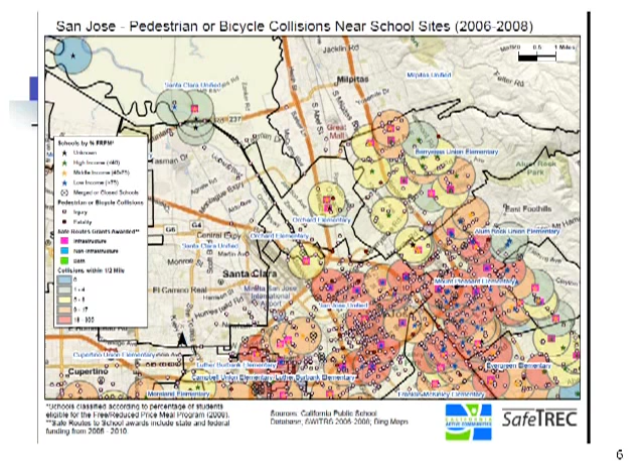Another activity is constructing a database of about 8,000 California schools, primary, secondary, and high school, and conducting mapping of collision injuries around these schools. This is an example. We would like to expand this into a database where we can rank schools with respect to walkability or potential for walking and biking, and also potential for injury reduction.

Another project, this is close to home, obviously, is a study of pedestrian and bicycle safety around the UC Berkeley campus, called the UC Campus Periphery Project. And you can see a map there of several years of injuries. And we're at the end of a phase of that project where we've produced a report that will go to the university and also to the city of Berkeley.

We've conducted a number of other studies. This happens to be barriers to transit among seniors. By the way, our reports on all of these are on our website, and a number are also published.

Some examples of data activities. As everyone knows, there is a trend in funding and in resource allocation toward justification by data, by information and appropriate data. One of our early roles has been a contract with California for data support for the Strategic Highway Safety Plan.

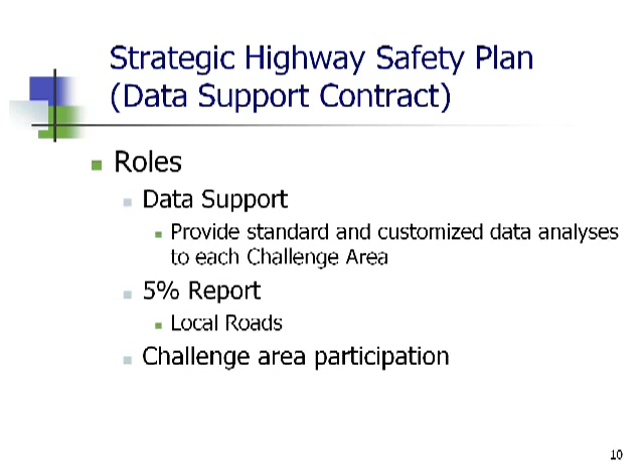We provide various reports for this whole program. We also do the 5% report for the non-state highway roads in California. We produce all the data, for example, for these various reports. And the 5% report for California and for every state is on the FHWA website.

One tool that we're not talking about today, but we could at some other webinar, is something called Continuous Risk Profile, developed by a postdoc named Koohong Chung, who's now working with Caltrans. It's a method for fitting collision risk to the actual underlying risk. It has the advantage that it filters out noise to a greater extent than moving window or peak searching, producing a more stable pattern.

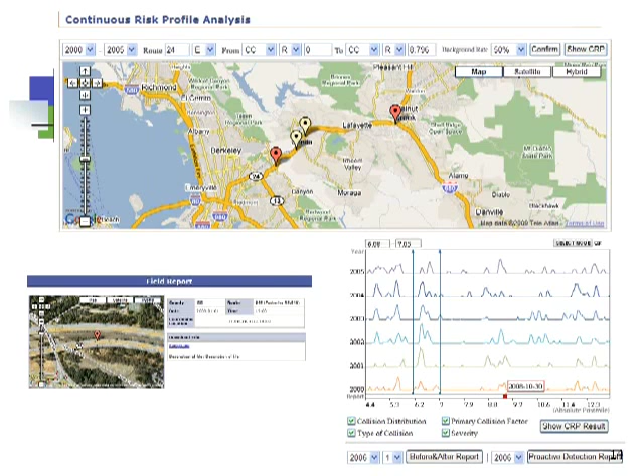Finally, just a summary of what we consider some of the main data steps for pedestrian and bicyclist safety, and some indications about what we're going to be discussing today. These are roughly in a sequence. The first area would be to enhance crash and injury data, and we have a number of projects. One is working to enhance the police collision report in California.

That's actually been a major long-term project, very difficult, lots of inertia, but we hope to be able to bring better pedestrian and bike safety data or infrastructure and crash data into the police collision reports. And one other project, of course, that's going to be discussed today is our geocoding of California crashes.

Data access: we think that a primary step in improving safety is to make data more accessible to the public and to stakeholders in general. And John is also going to talk about that. Our TIMS website is now publicly available. It took several years working with lawyers from various state agencies to accomplish that, but there it is.

Pedestrian and bicycle volume. One of the shortcomings in this area of active transportation is the lack of exposure data. And Bob Schneider has been working on that for the last several years here as a doctoral student and now as a postdoc, and is going to be presenting on that.

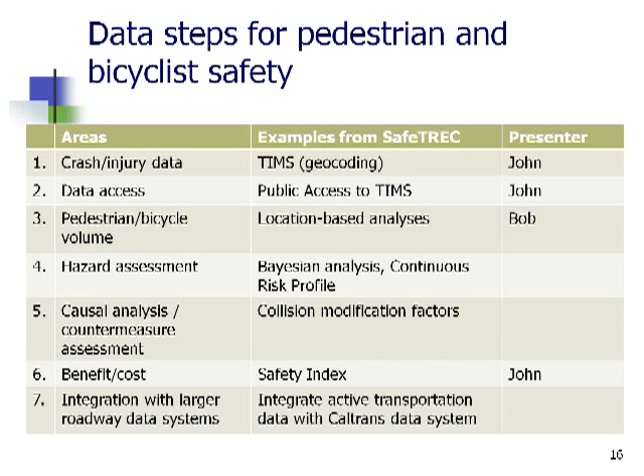Just as a final wrap-up here, since I'm going to turn this over to John in a moment, our safety index, which John is going to describe in detail, last year won a FHWA Roadway Safety Foundation Award. And we're quite proud of that. And we've actually developed the tool beyond what it was when we won the safety award. So I'm going to turn this over to John now.

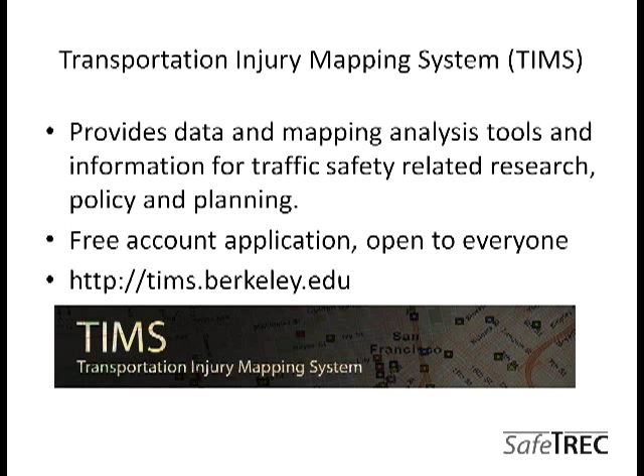And one of the things that made this site happen is essentially taking publicly available collision data in California, which is known as SWITRS, so the Statewide Integrated Traffic Records System. So I'll say SWITRS throughout the presentation, so keep in mind that it's just the California collision data.

And with the SWITRS data, what we did over the years is develop a method to geocode or provide a latitude and longitude coordinate on approximately 90-something% of the collisions. And once you have that coordinate, that's what enables you to do different types of analyses and to incorporate into a mapping website.

So just an overview of a couple of the main mapping tools on the site. We have this query and map tool, and you can put in specific data queries, get summary statistics, and then download specific collision files with the records of your query. And then it also has party and victim files.

So every crash in California, you have one or more parties, and then for every party, you have one or more victims that were injured. So it's a huge database of collision data. And then we have a nice little Google Maps collision display on the final page.

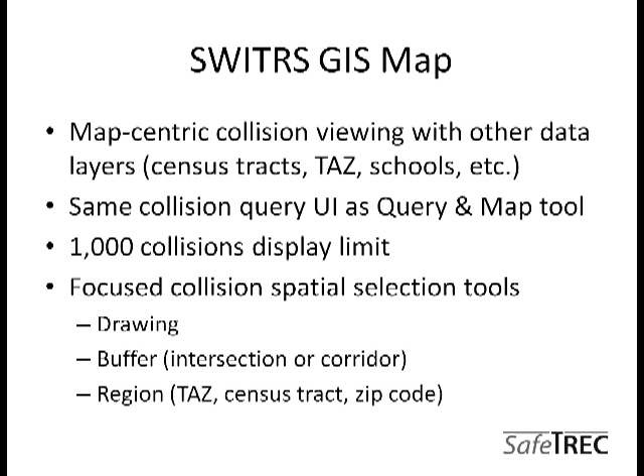And then another tool that we have is this SWITRS GIS map, and this gives you a more map-centric approach, shows fewer collisions, but you can zoom in and hone in on a specific area of interest and only get those collisions in a small space. And I'll show you utilizing that tool to download some data.

So I'm going to go here to the TIMS website I have up here. This is the home page, and after the presentation, or during, I guess, you can apply for an account and you'll be sent a password. I guess probably best to wait till after so it doesn't crash while I'm demoing.

But as I mentioned, we have several mapping tools on here and this benefit cost calculator. And so first, I just want to do a brief run through of each of these tools. It may be kind of quick for the presentation, but we have tutorial videos, step-by-step tutorials that show you how to do everything I'm talking about here. So you can spend an hour later watching those tutorials on your own time if you like.

And so the first tool I want to talk about is this query and map tool. And so basically it allows you to input a time frame. So I can select several years here. And then you can select one of these counties in California, and each county you select, it populates with the cities in the county.

So you can focus on a specific county, city, or actually you could choose a particular state highway if you were interested in a single corridor. And so for the demonstration, let's just choose Oakland, California, which is near us here in Berkeley.

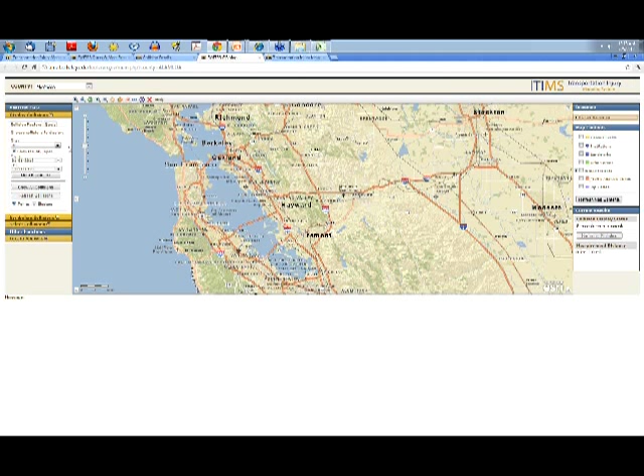So here I'm showing Alameda County again, and as David mentioned, we've done some work looking at safety around the UC Berkeley campus, which we're located just nearby. And so I'm going to go ahead and zoom to Berkeley and choose several years here.

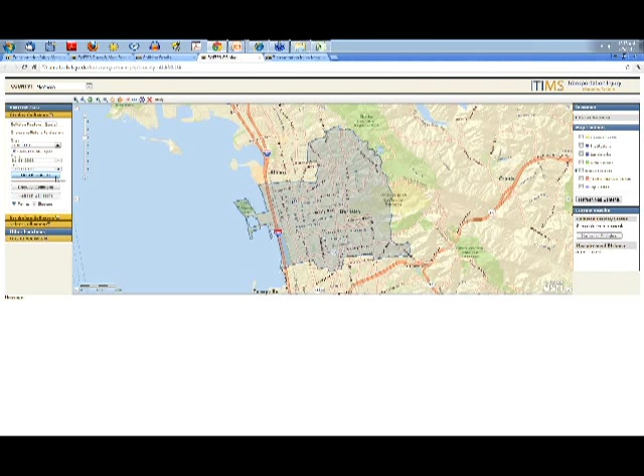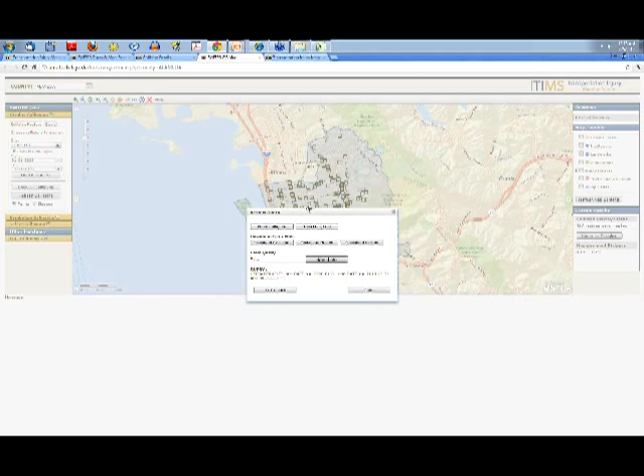So let's say 2006 to 2010. And then I can choose, let's look at pedestrian collisions for this demo. And when I show these collisions, you can see them appear on the map. So we had 457 pedestrian collisions that were mapped during those 5 years.

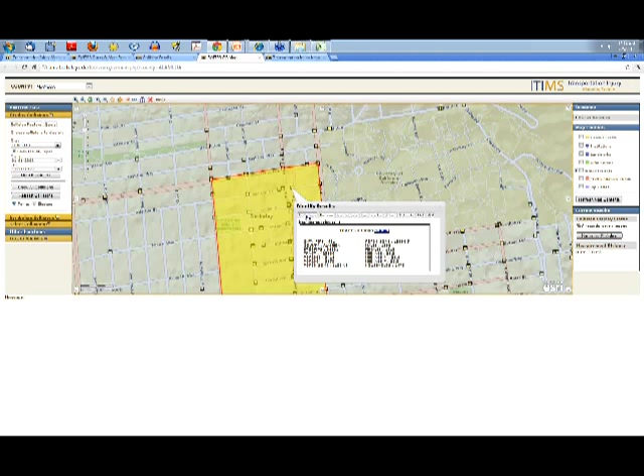So if I zoom in, we have all the same features that I showed on the other map. You can identify the results. You can go to the Street View profile, but you can also look at different types of information, the census tract that occurred in, or different types of other layers here. And I can turn these on the map to show institutions.

For example, let me zoom out. You can see the blue are the schools, and we can just show the outline of census tracts. So a great way to hone in on a particular area depending on your research or your field of interest.

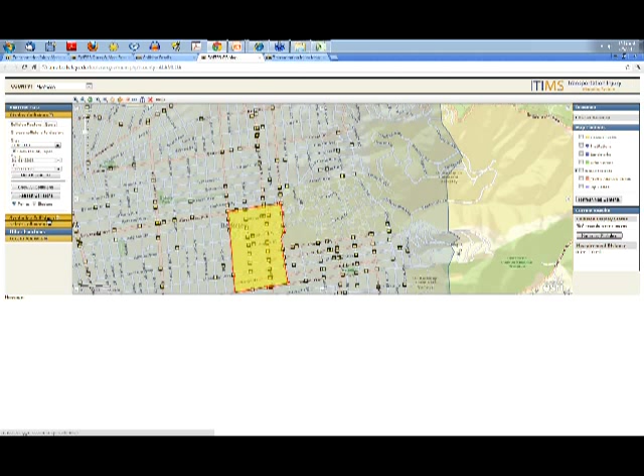So I'm going to turn these off and give a demonstration of essentially selecting this data. That's one of the most powerful components, is you're not interested in the entire city, the entire county. You want to be able to select only a small portion of the data. And so we give you some options to select collisions.

And so, for example, I could just come here with the drawing tool and say, these are the collisions I'm interested in, and say select these collisions. And you can see now the collisions have been highlighted. Over here, it shows that 19 collisions were selected.

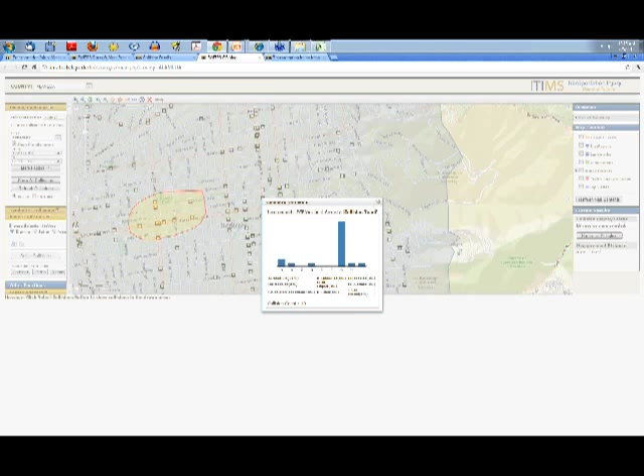I can get some statistics of which collisions those were, and the same type of information you saw, but in a kind of more focused way for only those collisions. So that's a really powerful tool, just to be able to select those collisions there. And we also provide some tools.

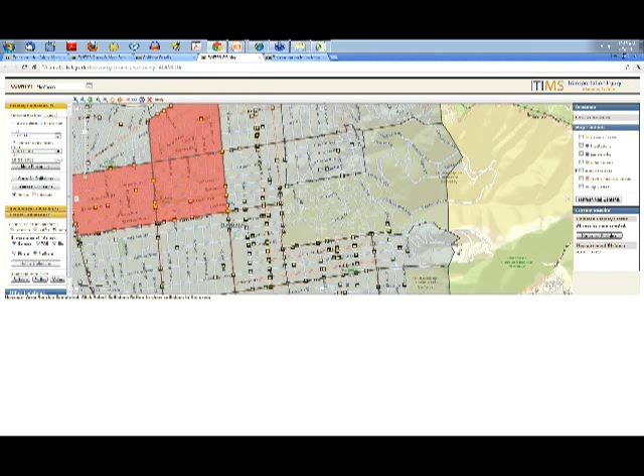For example, if you were interested in looking at several census tracts of information, you could click on several census tracts and then select collisions again, and it will grab only those collisions in the census tract. We have that for traffic analysis zones, or zip codes as well.

And so one of the other tools is essentially a corridor-based selection tool. And we give you some options here. Let me just put in a certain distance, let's say 300 feet. And we can do anything from clicking on adding one intersection. We could select collisions with that. If you had multiple intersections on a corridor you're interested in looking at, you could do that. And each time it'll draw a selection, and you can select those crashes.

So for now, let's say that we're interested in a corridor here along the edge of campus. This is actually one of the main corridors coming into campus, but there's actually heavy traffic and pedestrian activity as well, and so it can be kind of perilous to get across this intersection or along this corridor. So we want to select some of this data so we could view this in the potential benefit cost calculator I'll show next.

So if I select these collisions, you see they're highlighted again, and now I can click on the collision data file. And it's going to generate a data file with only those collisions that occurred there. And so you can see I have this information along Oxford Street.

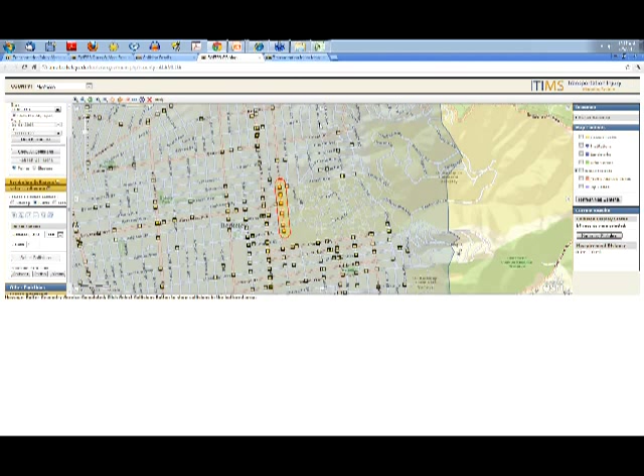And then let's say, well, I'm interested in seeing, well, what can we do about the collisions occurring there? What potential safety countermeasures would be useful? And so that's where our benefit cost calculator tool comes in. And let me bring up my slides again.

And the idea with the benefit cost calculator is that it is a way to evaluate these potential safety countermeasures. And the benefit would be the reduction you have in the comprehensive collision cost if the collisions were avoided, and then the cost would be the construction cost to build such a countermeasure.

And this calculator, as David mentioned, was originally created a couple years ago in a different format that we've improved now for the web. And this tool is required for California state agencies that are applying for Highway Safety Improvement Program funds to have a benefit cost of any potential projects they're interested in, including that on their application this year.

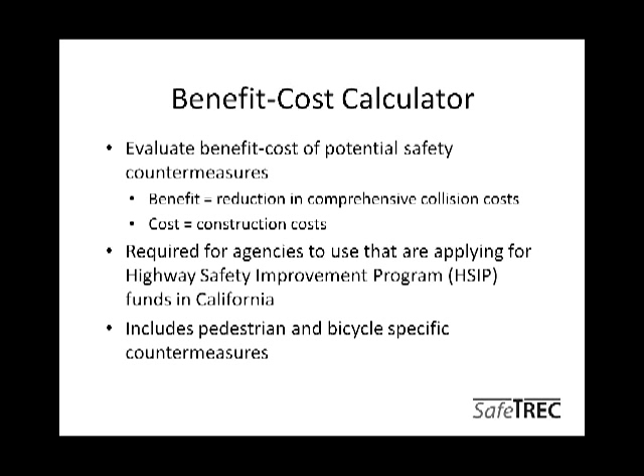And for this call, I'm going to focus on some of the pedestrian and bicycle specific countermeasures that are available. And the idea with this tool is that it's required for agencies applying for funding in California, but it's really a great tool for exploratory analysis as well, and to really get an idea if something is an effective use of funds.

And I say that in conjunction with also a manual that was developed, this Local Roadway Safety Manual, with the partnership with Caltrans and FHWA and SafeTREC, especially Ted Devini at Caltrans, if he's on the call. He's put a lot of effort into this manual.

And it's focused on California agencies applying for funding and using this tool, but it's really a great resource for conceptually how to go about identifying safety issues and then analyzing the data and then selecting countermeasures and finding out what is the benefit cost of those countermeasures. So it's a great guide for anyone just exploring these types of things. And so you could use that in conjunction with our tool.

And so I'm going to go back to the benefit cost calculator, and I'll just input some basic information here. And so once you've input your information for the project, you want to go ahead and select the time period of interest. And so I think I selected 2006 to 2010 for the pedestrian collision data. So I have a 5-year time period, and then I'd want to select what countermeasures I'm interested in.

Thanks so much, John. As he mentioned, I'll be talking about some pedestrian and bicycle volume modeling and tools that have been developed in relation to crash risk analysis. So pedestrian and bicycle volume modeling is even broader than its applications for crash risk. I'll be touching on some of those other things as well. Some of the questions we want to answer with pedestrian and bicycle volume models are understanding how many people overall are walking and biking, also where they are walking and biking, and then, of course, relevant to our discussion today, what types of locations may have the greatest risk of pedestrian and bicycle crashes.

Thank you. Yeah, I'll do this as a slideshow. All right, we'll start again.

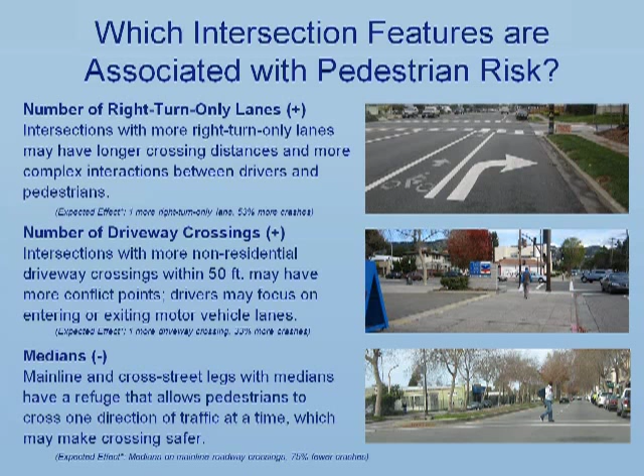So we found that right turn only lanes, driveway crossings close to an intersection were associated with higher risk. Having medians at a crossing were associated with lower risk. Not surprising given some of the other research that's been done, but we had some evidence from actual crash data.

Now, this pedestrian risk assessment that we did is based on only 81 intersections where we were able to actually collect pedestrian volumes. If we had a really robust way of estimating pedestrian volumes at other types of locations, we could get a much bigger data set to give us more confidence in some of these findings and develop better crash reduction factors for pedestrians. But we only have the counts that we used for this.

So that brings up the idea of using demand analysis methods to come up with estimates of pedestrian volumes. And that's really what pedestrian volume modeling is about for safety analysis. Now, I'll cover just a couple of these versions of analysis methods quickly and then focus mostly on location-based models because that's what we've been involved with here recently. But just so you know, there's an NCHRP project 08-78 that's looking at all these types of methods. And there's also some other research efforts going on in this field.

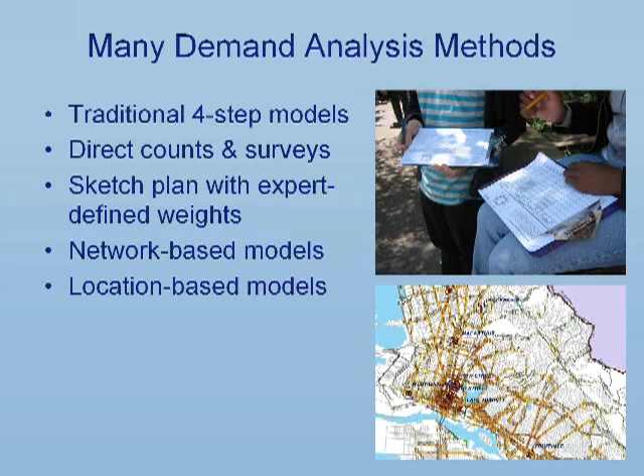We aren't getting pedestrian travel that's occurring within zones, so from one block to another, or if somebody drives from one zone to another but then walks the final 2 blocks to their destination. When they're making that walking part of their trip, they're actually crossing roadways and may be exposed to risk for crashes, but that wouldn't be captured in a traditional model.

We also, of course, have simply pedestrian and bicycle counts, and we can go to a number of locations, have interns and students go out and help do counts, but even with lots of help, it's hard to get lots of locations. It took us 2 different years to get 81 locations captured in Alameda County.

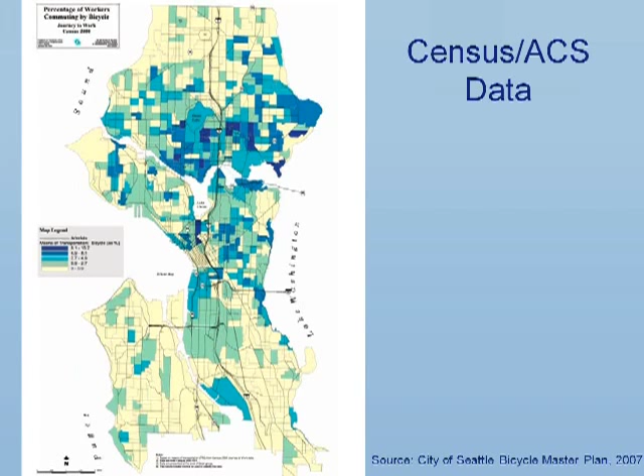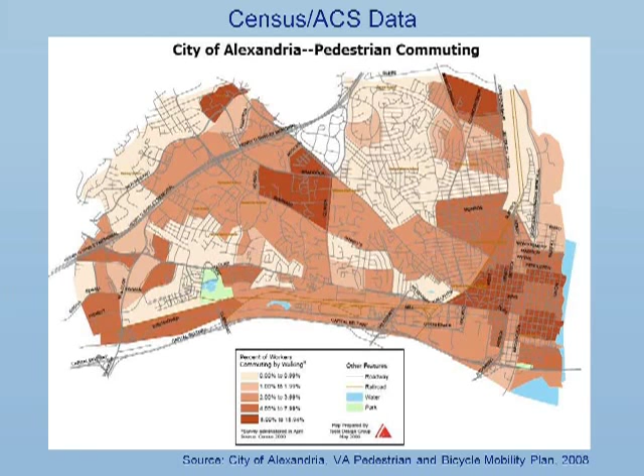You can also look at census data, and that can show you some general geographic patterns in pedestrian and bicycle use, but it only focuses on commute to work and has some limitations in terms of being the commute mode that people use most often to go to work. So in addition, it doesn't capture the pedestrian or bicycle volumes at an intersection or for a specific street segment. It just gives you general neighborhood level at the census block group.

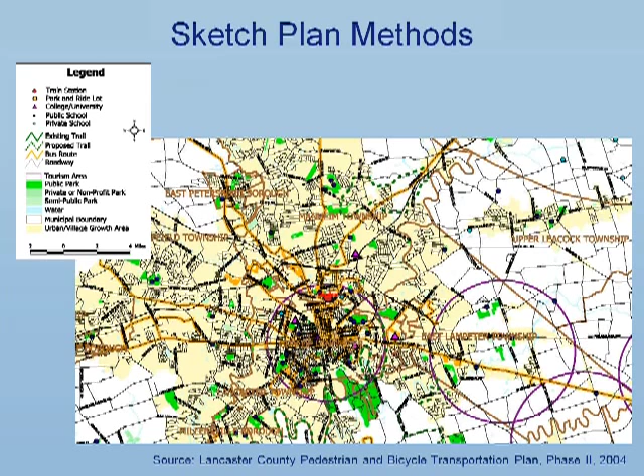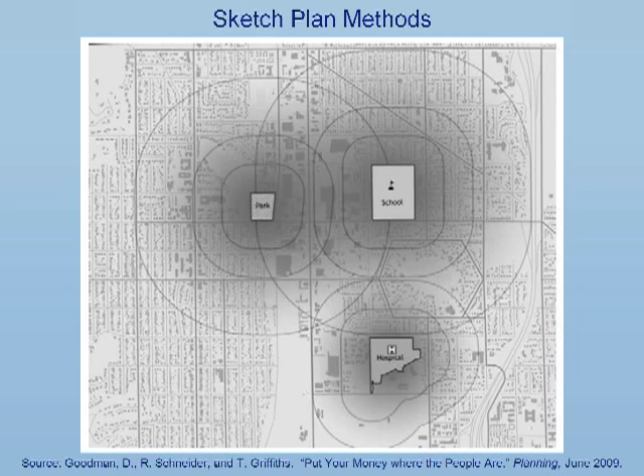We also have sketch plan methods, which have been used in a number of communities to provide some sense of the relative attractiveness or relative levels of pedestrian or bicycle activity given the features that are available. More pedestrian or bicycle activity is probably going to occur close to attractors like schools and hospitals. And if you put all these together using GIS and overlay them, you can see that some parts of the city may have relatively higher pedestrian or bicycle demand than others.

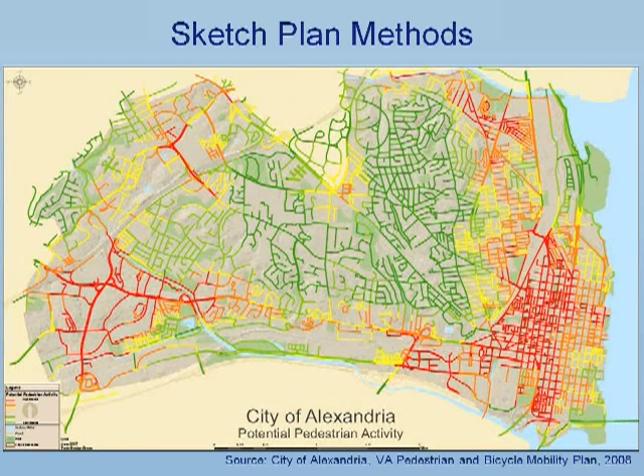But it doesn't give you specific information about the number of pedestrian or bicycle crossings or number of pedestrians and bicyclists using a particular roadway. We do have a couple of other types of models that have been developed in the last 10 years that do give pedestrian or bicycle volumes and a couple of them are network-based.

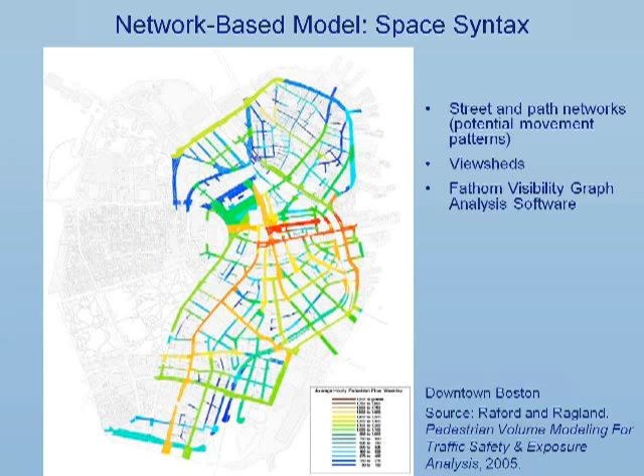So Noah Raford brought over the idea of space syntax and did some work with David Ragland on that here. And it looks at the network connectivity and uses special software to evaluate pedestrian volumes. But it requires that special software and isn't necessarily user-friendly to apply.

In addition, Kelly Clifton, when she was at Maryland, developed a pedestrian volume model there that's based on a process similar to the traditional four-step model, but using very detailed pedestrian analysis zones. So each street block face, and calculated the amount of pedestrians traveling from one block face to another and then crossing all the streets in between, taking into account the entire network effect. So that was useful, but also very time intensive. So it may not be easy for practitioners to apply.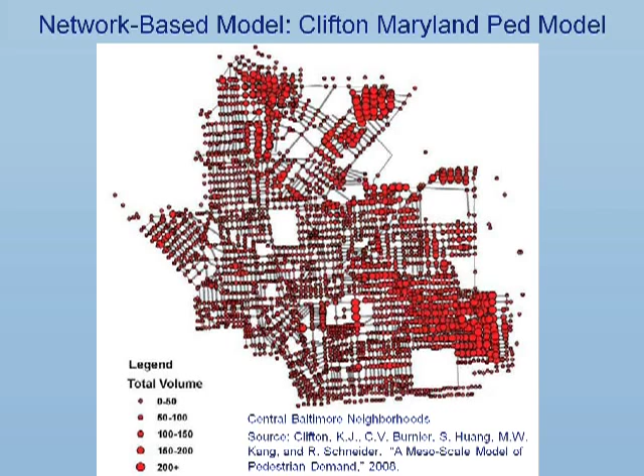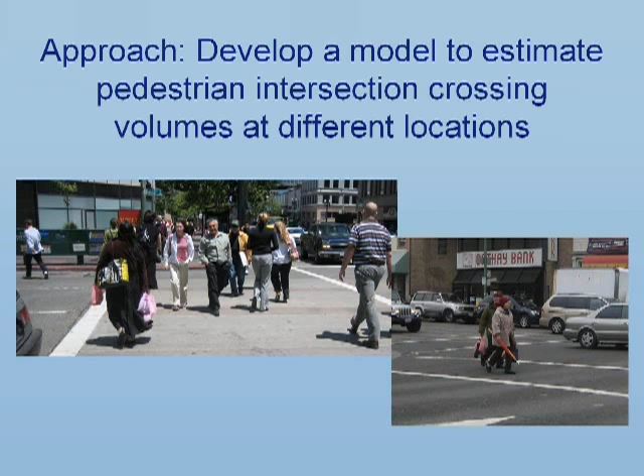That's led to a number of efforts to develop location-based models, which are a little bit simpler to develop and then use. The approach really is to estimate the pedestrian intersection crossing volume at a particular location, essentially not think about how pedestrians got there or where they're going to, but just say what characteristics of the surrounding area may be associated with seeing higher or lower volumes of pedestrians at this particular location. So it's trying to simplify the process.

And here's some examples of researchers who've been doing location-based models in the last 5 or 6 years. And a very quick summary table of these, and I'm not going to describe every single word in here. It's in one of the papers we've done recently for TRB, but I did want to highlight that there's some common factors that are shown in these models to be significantly associated with pedestrian volumes.

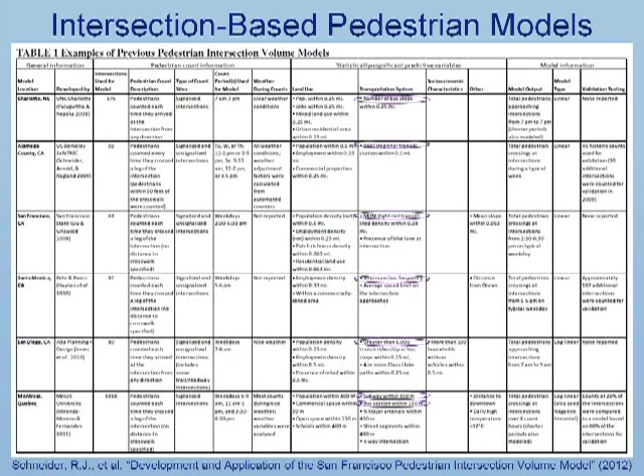So population density in the surrounding area, employment density, the number of commercial properties, so retail establishments, and then proximity to some form of transit shows up in a lot of the models as being significantly associated with higher pedestrian volumes.

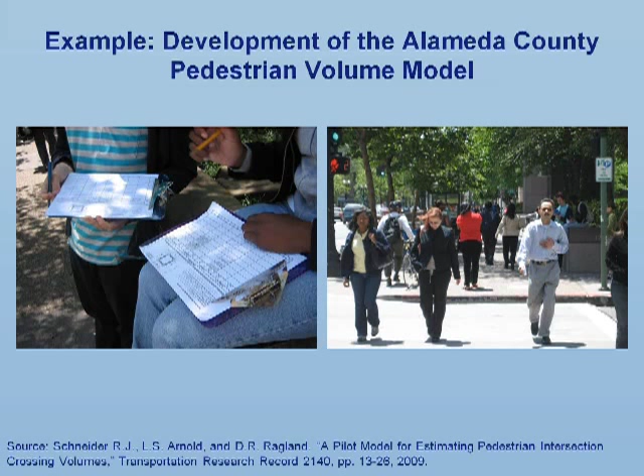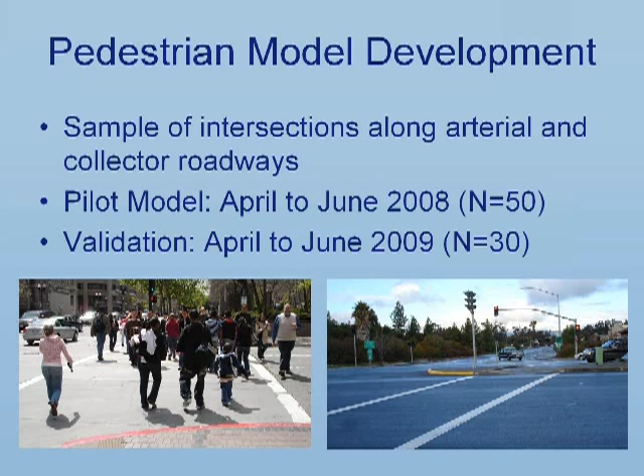To give you a sense of how we developed our first location-based pedestrian volume model in Alameda County, I just want to go through a little bit of the background of that. We developed a sample of locations to collect volumes at and developed a pilot model in 2008 using 50 intersections, and then did some validation analysis in 2009 using an additional 30 intersections.

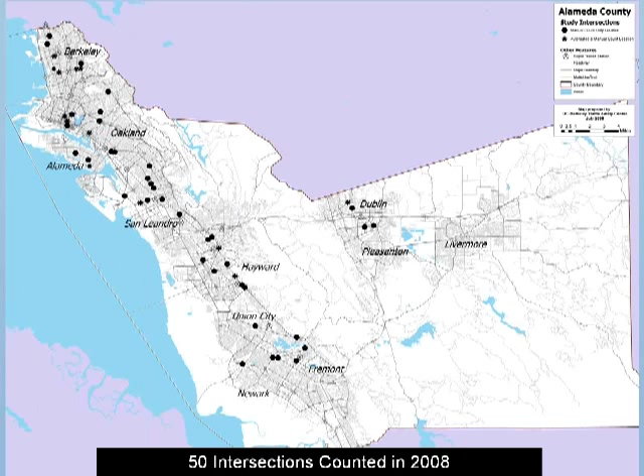There are 7,500 intersections along arterial and collector roadways in Alameda County, so we obviously couldn't count at every single one of those. We chose 50 that we thought were representative and did that using a stratified random process accounting for population density, proximity to commercial properties, and the income levels of different neighborhoods to ensure we had a wide variety and would get a good range of pedestrian volumes at each intersection from high to low. And these are the 50 intersections we counted in 2008.

From that, the original counts that we took over 2 hours at 2 different times were adjusted for differences in weather and being at slightly different times of day. And we extrapolated those out to a full week count based on automated counters providing us with pedestrian activity patterns near the intersections. So using 13 different counter locations, we figured out that the composite or typical Alameda County pedestrian activity pattern looks something like this.

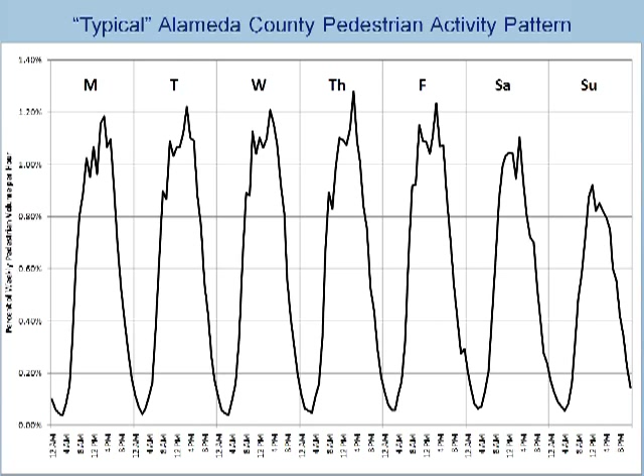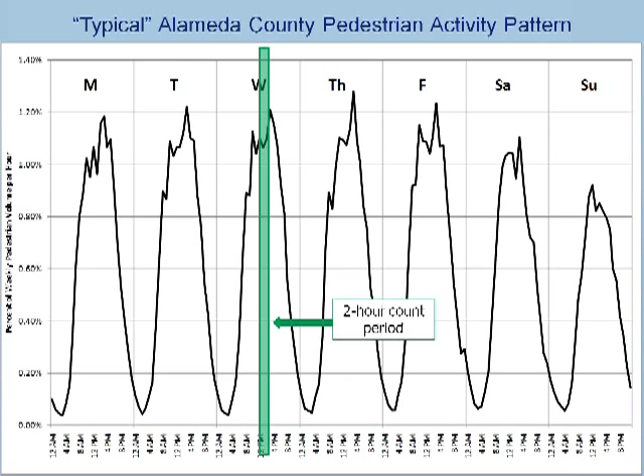The percentage of pedestrian volume each hour of the week, generally higher during the middle of the day and lower at night, a little bit higher on weekdays than on weekends. From our 2-hour count, we could then extrapolate out to the full week using this entire pattern. And from that, for example, we were able to estimate that approximately 5,600 pedestrians crossed the intersection of Martin Luther King Way and 17th Street in Oakland per week. This was in spring 2008. And we did that at all 50 intersections.

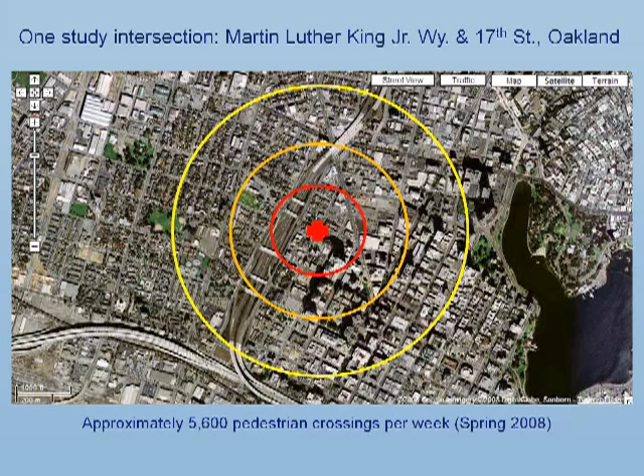And so we could compare those counts with the characteristics of the surrounding area within a 1/10 of a mile, 1/4 mile, and then a 1/2 mile buffer. And that's what's shown on the map here. Using regression, then, we were able to associate the characteristics of the surrounding area with the actual pedestrian volumes and come up with an equation to represent what those pedestrian volumes were over an entire week. And the factors that I mentioned before were the significant ones in that model.

So from the model, we were then able to provide estimates of what the total pedestrian volume over an entire week would be at all 7,500 intersections throughout the county.

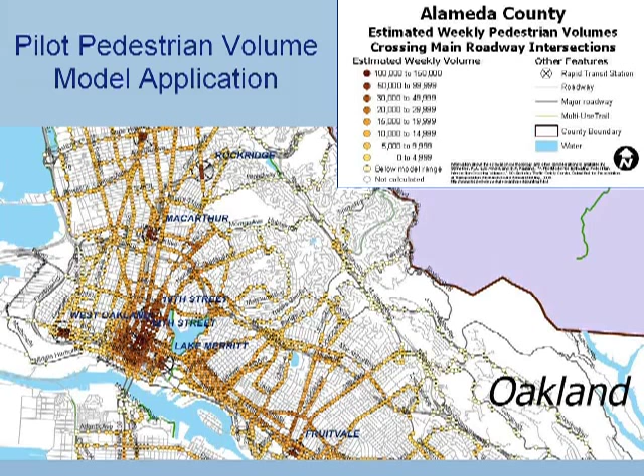This focuses in on the Oakland area, and you can see the highest volumes in downtown Oakland. Those are the darkest circles there. Another thing that this simple sort of model structure allows you to do is to use a spreadsheet to forecast future volumes, at least estimate what they might be if certain changes occur in land use in particular.

So this is an intersection close to where I live along Telegraph Avenue. I input the data that goes to the model, and then the spreadsheet calculates an estimated pedestrian crossings per week. If there's development in the area over the next few years, we may see that population and employment double within this area. So what would happen if those things occurred? So if I double the population and the employment in those radii around the intersection, you can see that the pedestrian crossings per week go up to 20,000 as an estimate.

Also, if this new development draws in more commercial retail properties, what would happen there? We can add that to the calculation and see the impact. So it's a fairly simple tool once you have the model created to put that equation into a spreadsheet and use it.

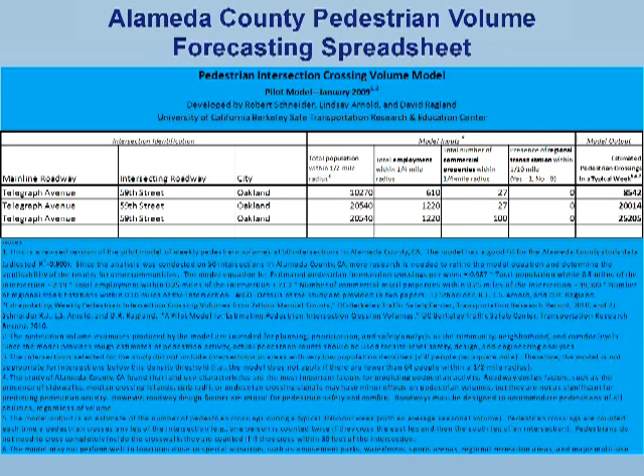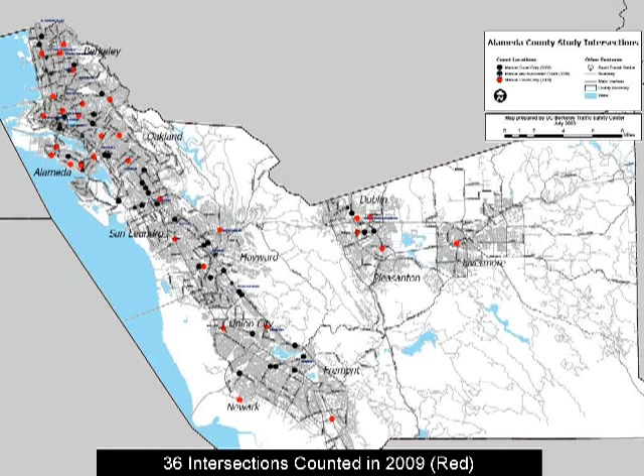Now, that all sounds great, and it's important to know that this is available and it's possible to do, but we also did some validation testing of the models. And it's important to know what the strengths and limitations are based on how accurate the estimates end up being compared to other counts. So we counted at 30 other unique intersections. Several of them were counted at the same intersection to compare from year to year, but we counted at 30 entirely new intersections to see how well the model would work.

One other thing to point out here is since we used linear regression in this model, we ended up getting some negative predictions for pedestrian volumes. And that's not going to occur, of course. So in later versions of the model, we used log linear regression, which essentially removes any possibility of giving negative volume results.

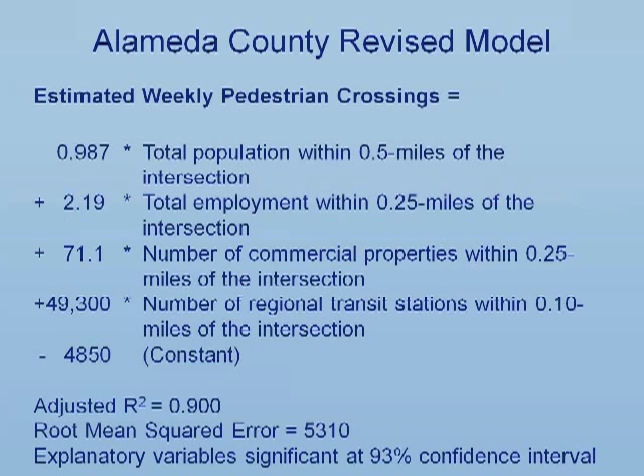So we ended up just adjusting the coefficients on the model to make our final recommendation about the model to use. And this is the one that I showed in the spreadsheet a little bit earlier with those coefficients.

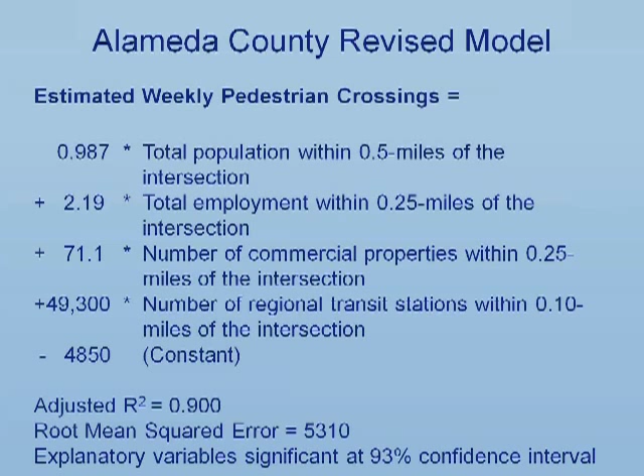It's important to remember that these types of models are designed for estimating volumes at the neighborhood, corridor, and community levels. But if you really want to do site analysis for safety or engineering at a particular location, you should probably go out and still do a count because the volumes just aren't predicted accurately enough at any particular location. You can get a broad sense across neighborhoods in different parts of the city, but it doesn't give you an exact count at a location like an intersection.

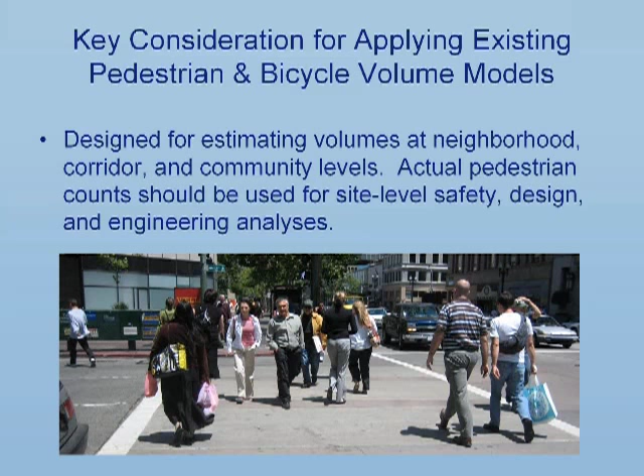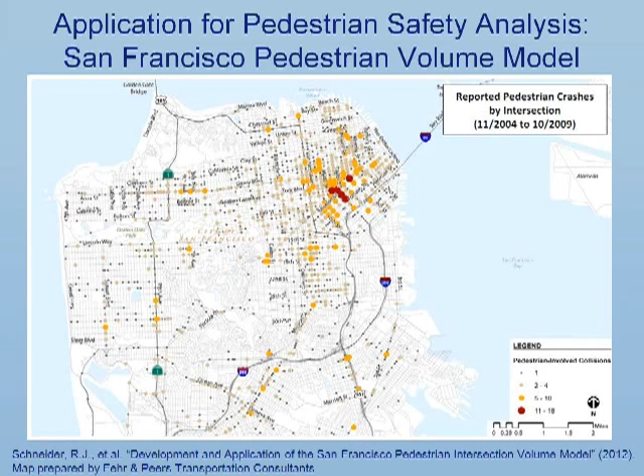One other application I wanted to show is the pedestrian volume model that we developed in San Francisco, and that's been used for pedestrian safety analysis there. These crashes are over 5 years, and you can see the highest concentration of crashes is in the northeast part of the city, which is the central business district.

The model that we developed, I won't go into all the variables that were used, but a lot of them are similar to Alameda County, though not all of them. We ended up not applying the Alameda County model in San Francisco because there were definitely differences between one community and the other. Steep slopes were a factor in San Francisco, so were traffic signals. So those things were included in the model here.

So going back to the map, we can see the concentration of crashes and then compare it to where higher and lower volumes of pedestrians were estimated. And the highest pedestrian volumes are occurring in locations close to where the highest number of pedestrian crashes are, as you might expect. But once we control for these pedestrian volumes, we can then identify locations that have the highest risk per pedestrian crossing. So it really shows a different picture of where high-risk locations actually are.

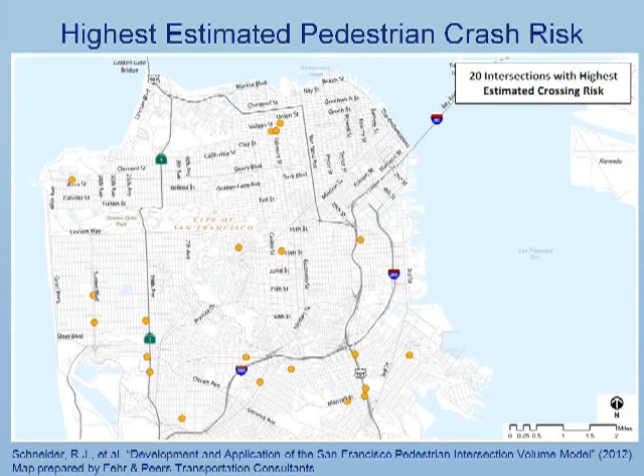It's not that the locations downtown aren't important for pedestrian safety, but this is a different way of evaluating and thinking about risk. And we noted that a number of these were at unsignalized intersections, multi-lane arterial roadways. Some of them were located near schools, and some were in areas with steep slopes. So this gives us a sense of where we may want to do more systematic type treatment to improve pedestrian safety.

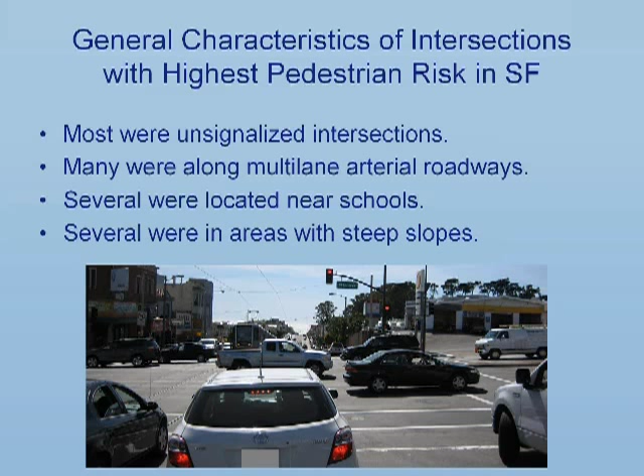And with the last few minutes, I want to just touch on a few bicycle intersection volume models that have been developed. There are fewer bicycle models than there are pedestrian volume models today. In San Diego County, ALTA led an effort to develop peak hour bicycle intersection volume there. It includes employment and also Class 1 bicycle paths within a quarter mile, and they've applied it and shown where the highest bicycle volumes would be expected in San Diego.

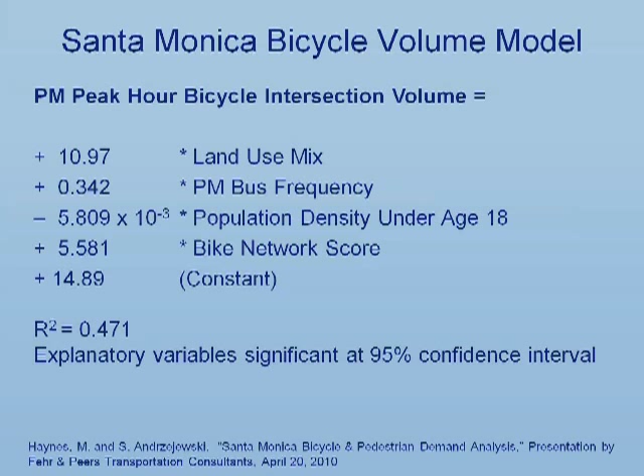Fehr and Peers has done some work in Santa Monica to develop a bicycle volume model there, including some slightly different factors. And then in Alameda County, we did some work to look at factors associated with bicycle volumes at the same set of 80 intersections that we looked at before, and found things like commercial properties being significant, as well as bicycle facilities on the intersection approach and roadway network connectivity.

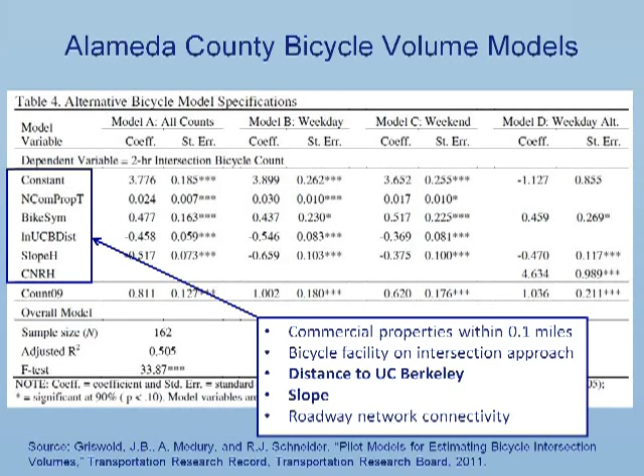Some factors that may not be seen in other communities would be distance to UC Berkeley. The campus is not located everywhere, so that's specific to this community. And then slope was a significant factor. Slope was negatively associated with bicycle volumes. So a few of these factors have been seen relatively consistently in the bicycle volume models that have been developed so far.

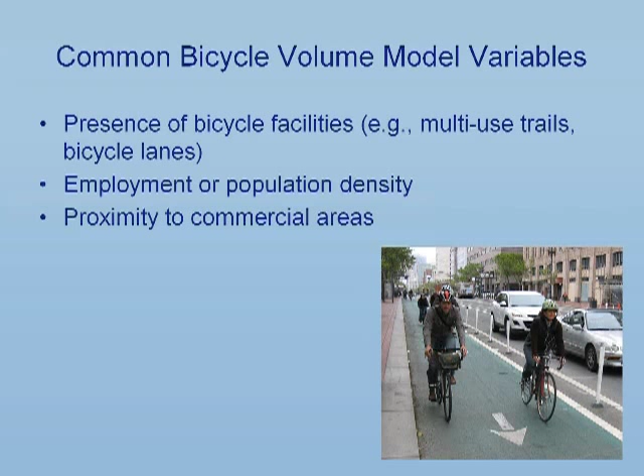And a few ideas for future research would be to look more at some of the intersection design features, the presence of things like traffic signals and median islands. Do those also have an impact on pedestrian volume as well as pedestrian safety? If we can bring them into the pedestrian volume models, we just make the prediction better. In order to do that, of course, we probably need greater data sets to work with, so more pedestrian count locations to develop the models on.

These pedestrian and bicycle volume models that have been developed so far really apply to typical sorts of locations. They wouldn't apply to tourist destinations or other special attractors. But for those types of locations, we should be thinking about methods too. Also accounting for broad changes in economic conditions, such as recessions as well as gas price spikes. Do those actually have an effect on the pedestrian volumes, and how could we integrate that into forecasting for the future?

And there's also a need to compare some of the different types of pedestrian and bicycle volume models that have been developed so far. The location-based with some of the network-based models, and compare them and see which ones may predict best and may be most useful for identifying exposure for safety analysis.

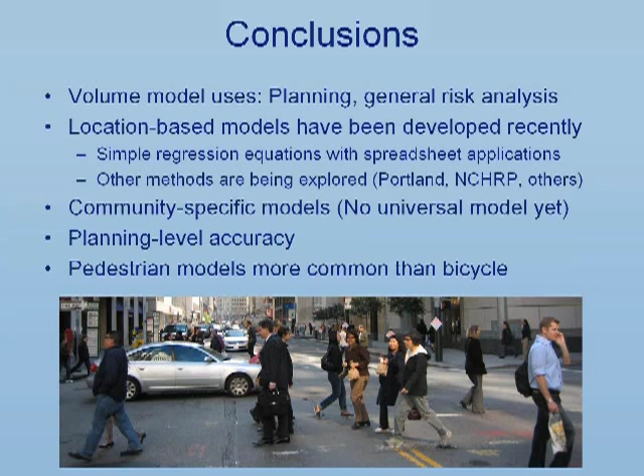So with that, I want to turn it back to James and the folks there to see if we have questions and can lead our discussion. Thank you. I appreciate this presentation. At this point, we will go ahead and run through some questions. I received several questions during the presentations. A lot of them were directed to John. So I'm going to start with you and the TIMS system.

First question is, what is the source of the collision data? Is it hospital or police reports? The data comes from the California Highway Patrol. They aggregate local police reports. All police departments are required to report the collisions to the California Highway Patrol. So the police reports that they compile on the street, they put into the database and send to the Highway Patrol.

And how did you get the latitude and longitudinal data associated with each crash? So that was an extensive process. I should have put a link to a paper on there, but essentially we developed some custom code to geocode based on whether it occurred on a local road or a state highway. So several different methods. That was a really long process, though. I can put a link in the slides to the paper if you're interested.